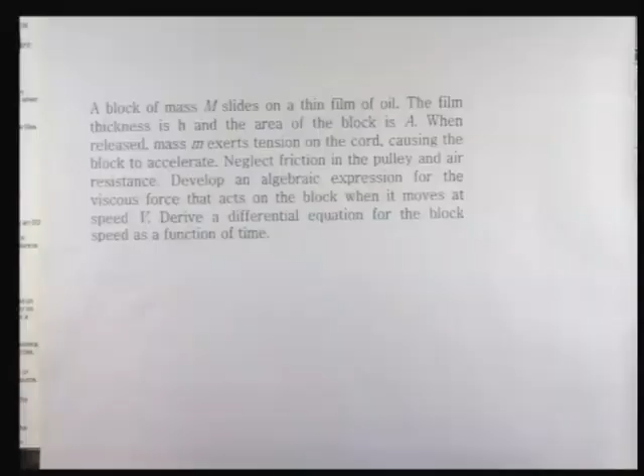So the first problem goes like this. I'll first read the problem. There is a diagram which goes with this problem, given on the next page. We'll move on to that, but first we will read the problem.

A block of mass m slides on a thin film of oil. The film thickness is h and the area of the block is a. When released, mass m exerts tension on the cord, causing the block to accelerate. Neglect friction in the pulley and air resistance. Develop an algebraic expression for the viscous force that acts on the block when it moves at speed v. Derive a differential equation for the block speed as a function of time. That is the problem.

It's a pretty simple problem.

So here is the diagram for the problem. This is the block, and the oil film is also clear here, and this is the pulley, and gravity acts in this direction, that is the vertical direction, and the axis system, the XY axis, have been shown in the figure at the top corner.

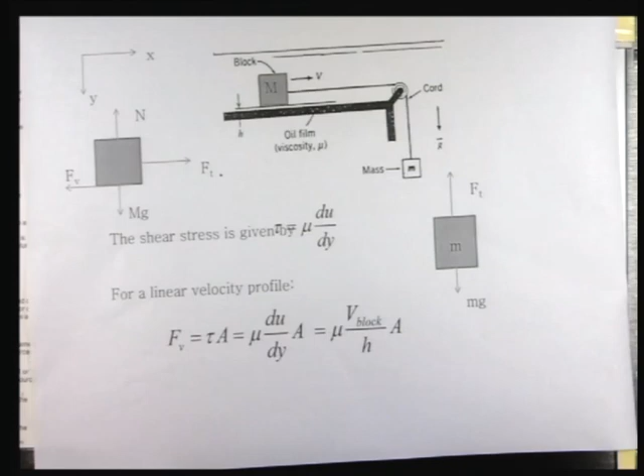So we have two bodies here, two separate bodies. The free body diagrams for these two bodies have been shown also, and the oil film is also shown here. What happens is that this mass m exerts a force on this cord, and this cord in turn exerts a force on this block, and this force in turn causes this fluid to move.

Now this fluid has some viscosity, and that is why this fluid will exert some viscous forces on this block. So overall it will be a balance between this viscous force and the tension of the cord for this block, and for the other block it will be a balance between the tension in the cord and gravity.

So first what we do is we write the shear stress in the fluid. The shear stress is given by this.

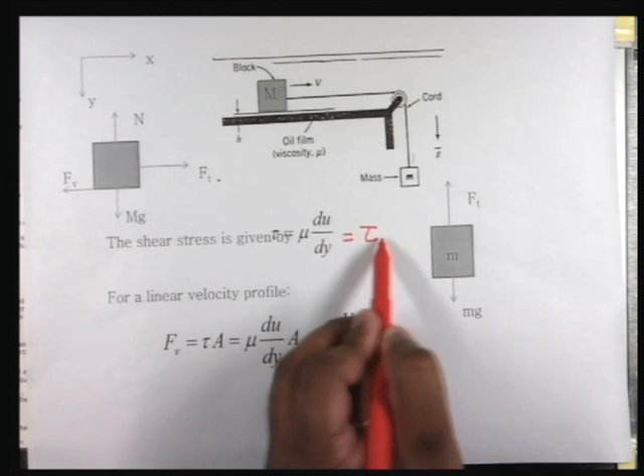I'm sorry, this tau is mixed up. So it will be, this is tau, more precisely this is tau yx for the fluid. This simply follows Newton's law of viscosity: mu times du dy. Mu is the viscosity and u is the velocity. Du dy is the velocity gradient.

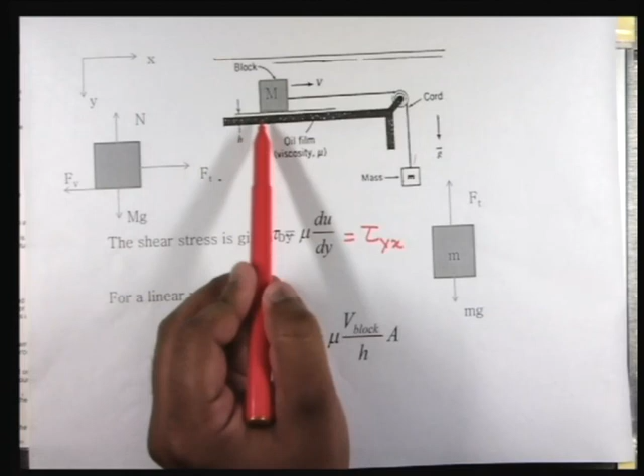Now what we do here is assume the velocity of this oil film to be linear, so velocity varies linearly with y. Velocity is 0 at the solid, and is v at the block surface. So this gradient simply turns out to be v block by h, where h is the film thickness and v block is the velocity of the block.

So this is the stress, that is the force per unit area. The total force on the block will simply be this stress times the area. So the stress is mu times v block by h, and that times area is the force.

Now we can write an equation of motion for the block, which is simply Newton's laws of motion for the block: mass times acceleration equals net force acting on the block, which is the tension of the cord minus the viscous force. For the falling mass, it is again the same, but in this case gravity will be acting, and of course again the tension in the cord.

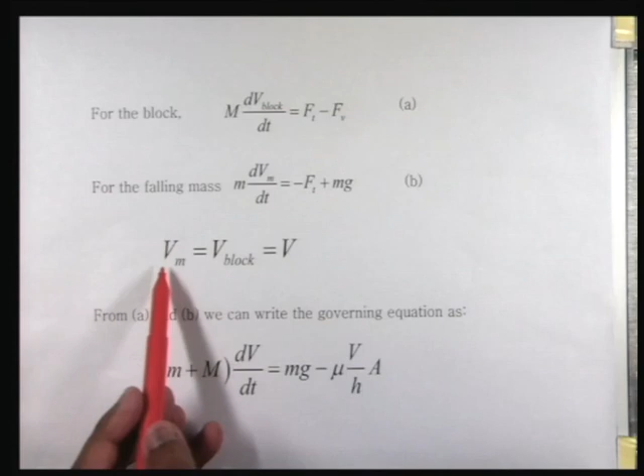Since the cord is not stretching, it has a constant length, so the velocity of the falling mass and the velocity of the block will be equal, which we denote as v. Finally, we add equation A and equation B and replace Vm or V block both with V, and we finally have this equation here.

You can see this is the final equation which we have been asked to derive. This is the acceleration dv dt. This is actually a very simple equation to solve, but we have not been asked to solve it. So that's it.

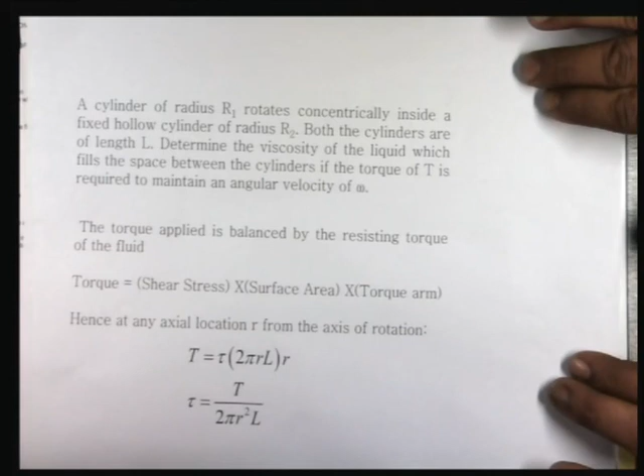Now coming to the second problem.

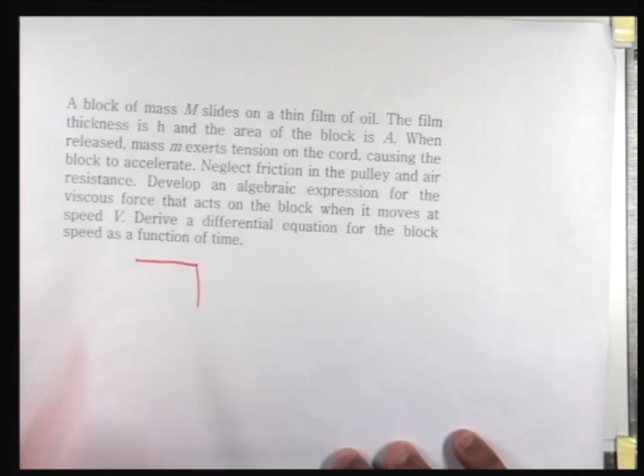A block which is pulled by a string by this system, using a falling mass, which goes over a pulley. There is a fluid layer, a liquid layer, which by virtue of viscosity gives a drag force in the opposite direction to its motion. As a result of this, it moves with acceleration. If the net force is not zero, there will be acceleration. Now you explain. So this is the problem.

This is the block of mass m, which slides on a thin film of oil. This red marked area is the thin film of oil. This block of mass capital M slides on this thin film, and this is attached. This film has thickness h, as given here, and this block has an area A for this portion.

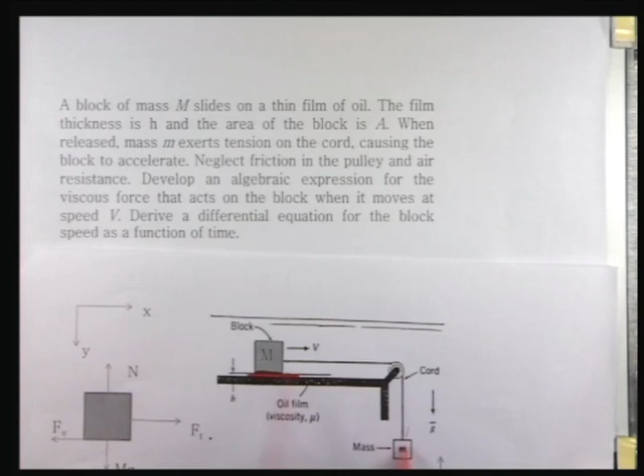This block, as you can see, is attached to another block of mass small m, with a string and a pulley system. This is a pulley and the string, and gravity is of course acting in the vertically downward direction, as mentioned here.

When this system is released, initially at rest, the mass will fall down because of gravity. That will create a tension in the string, and this tension will be acting throughout the string, causing this block to move.

Now when this block moves, the fluid beneath the block will also start moving. And because this fluid starts moving, it will exert a viscous force on this block. This viscous force will of course try to resist the motion of this block.

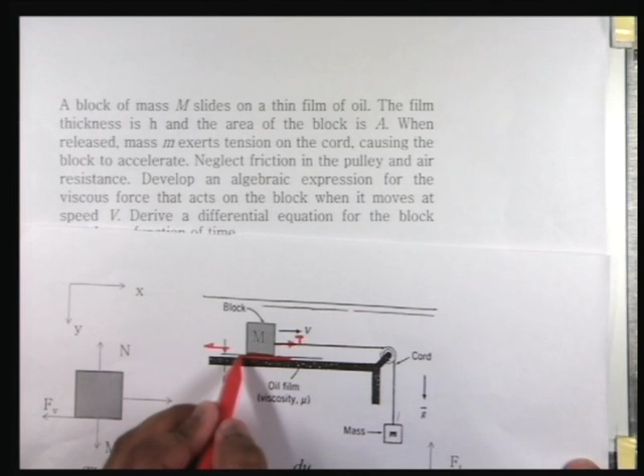The viscous force will act in the negative x direction. So this block will be acted upon by two forces: one along the string, which we call the tension T, and the second force will be the viscous force of the fluid, acting in the negative x direction. The oil will try to resist the motion of the block. Gravity and normal force also act here, but those are not important for this block since it's sitting firmly on the platform.

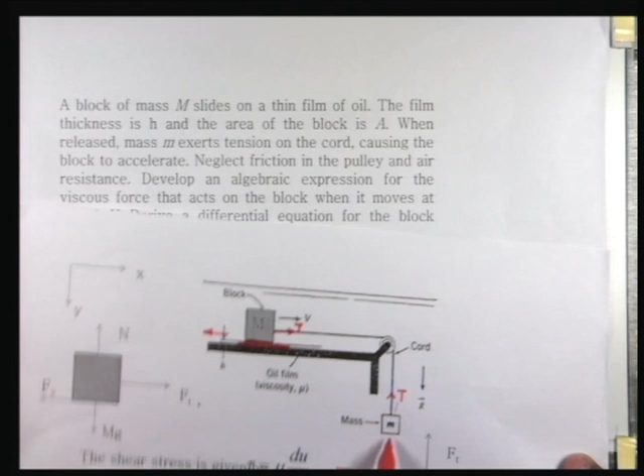For this block, the two forces will be, one, the tension of the string. Due to Newton's third law of motion, this tension will be the same as T, and gravity will act on this block in this direction. So this is mg.

So if we now draw the free body diagram for this block, as you can see, this is the viscous force. This viscous force acts at this surface because the block is in contact with the fluid on this surface. So this is where the viscous force acts, in the negative x direction.

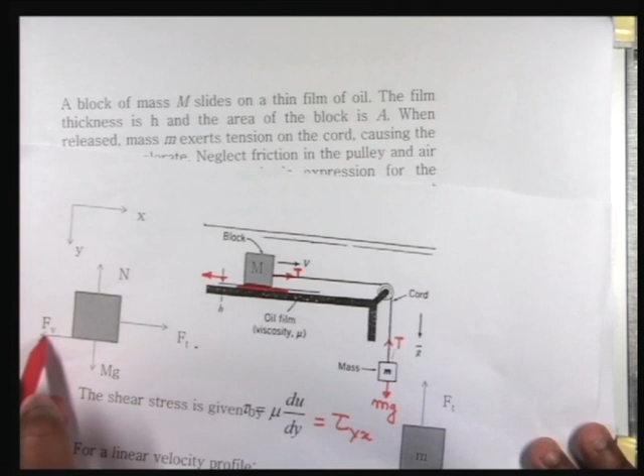We get the directions from this diagram. This is the x-axis, positive x, and this is the positive y-axis. This is the tension of the string, denoted as Ft here, which is the same as T, and of course gravity will act here.

This is the gravitational pull on this big block, and this is the normal force. Since it is sitting on the table, the normal force N will balance gravity. So now the only unbalanced forces on the block are Fv and Ft. Fv is due to the viscous force from the oil, and Ft is the tension of the string.

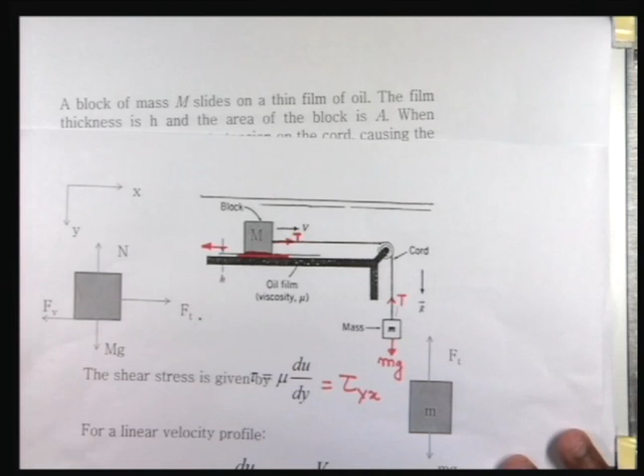Viscous force is given by viscous stress times area. So viscous stress in the oil times the area of the block. The viscous stress in the oil is expressed as follows: since the oil is assumed to be a Newtonian fluid, it follows a linear relationship, with this being the velocity gradient. When the block moves, it creates a velocity in the fluid, and that creates a velocity gradient, which times the viscosity gives us the total stress on this block.

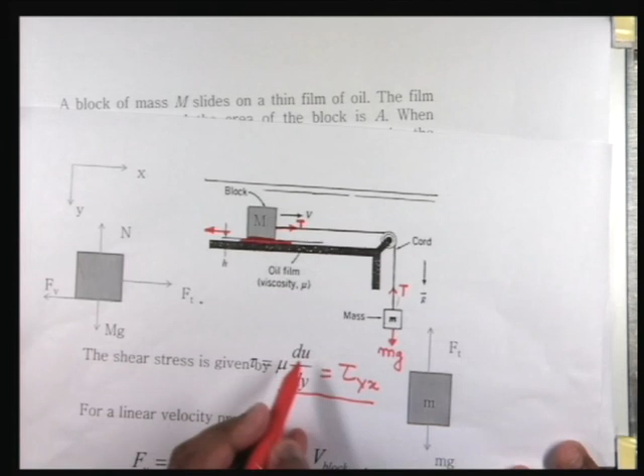Now we have to calculate the velocity gradient, that is the du/dy term. If we magnify the area where the oil film is, drawing it at the bottom of the page, it will look something like this: this is the block of mass m, this is the table, and the oil is here.

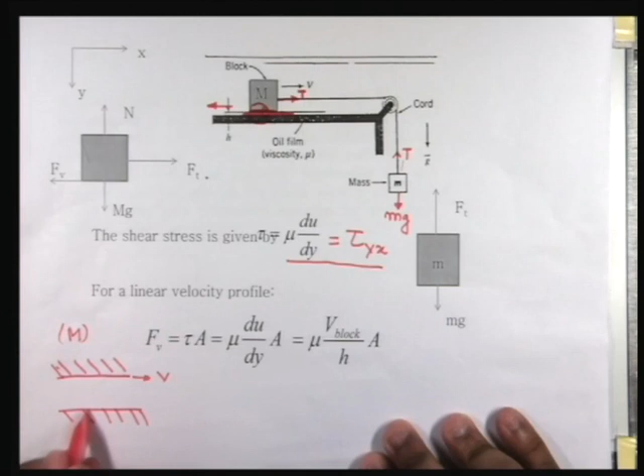We are only drawing a portion in the middle of the system. So if the block moves with velocity v, the velocity at this position will be v, and since the table is not moving, the velocity here will be 0. So this will be u here, and u will be 0 here, since the table is not moving.

We will assume that the velocity varies linearly with y. Suppose this is the y1 direction. We have already noted this as y, so we will call this direction y1, and this is the x direction as mentioned here.

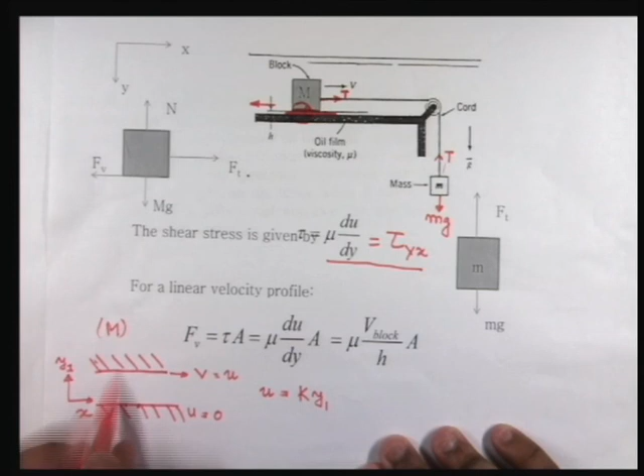The velocity u is 0 here, and the velocity is v here. So we can say u is a linear function of y, as we have assumed. If that is so, then we can write u equal to k times y1, since it's a linear function of this coordinate y1. Now we know that at y equal to 0, u equal to 0, because this is satisfied by the no-slip boundary condition, as discussed earlier. So that condition is satisfied here automatically.

Then we move on to this plate, where at y equal to h, this height is h as mentioned in the figure. So at y equal to h, the velocity here is v. So then we write kh equal to v, which gives us the value of k. So we know k equal to v by h. In this problem, this v has been denoted as v_block, so we write it as v_block.

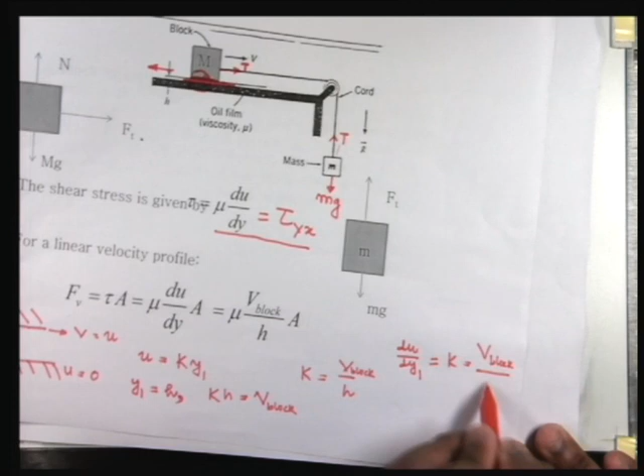So now we know this k. From this equation we know k, and we can substitute this expression for k here, and we can calculate du dy. So du dy1, that is equal to k, that is equal to v block by h. So this is the value of the velocity gradient that we needed here.

This is the velocity gradient, and that multiplied by viscosity will give us the viscous stress. So tau yx would be mu times du dy1. We use y1 here because y1 is the local coordinate for this channel. That is why we are using y1. So this will be nothing but mu v block by h.

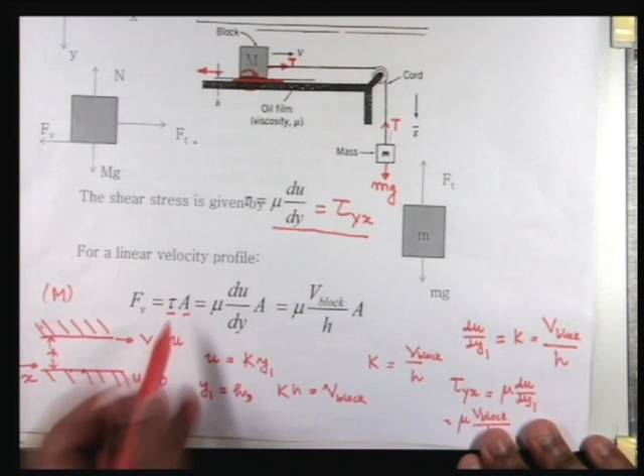Now the total force will be tau times area. Tau is the stress, and stress is the force per unit area, so it is force equals stress times area. Area is given for the block, A is the area of the block as mentioned in the problem. So now we have calculated tau, which is mu times v block by h, multiplied by area. This gives us the viscous force on this block.

So Fv is given. Ft we do not know, that is the tension in the string. That is an unknown that we'll have to determine later on.

So now we move on to this. Once this block is done, we move on to the second body. For the second body, only two forces are at work: these are gravity, this mg working vertically downwards, and the tension in the string, denoted here by Ft.

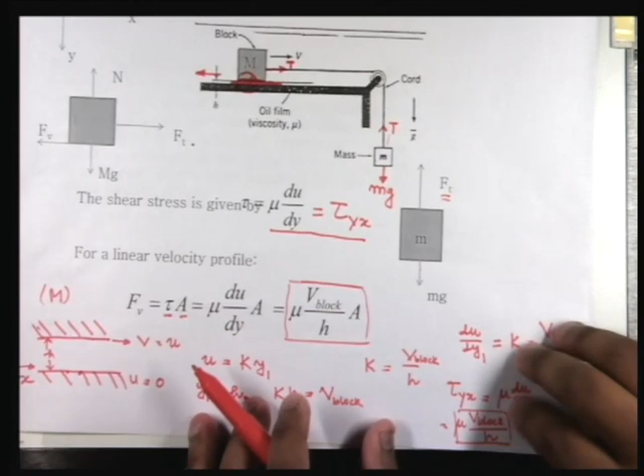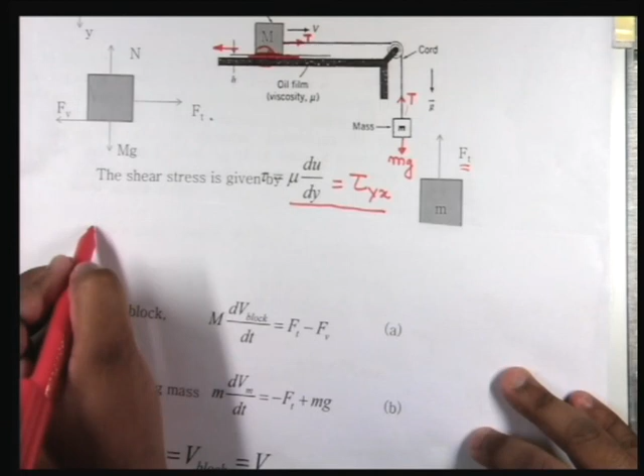This is a pretty simple problem for this particular block. So if we now move on to writing the equations for this block, this will be nothing but m times acceleration equals net force on the block. The net force on the block is Ft in the positive x direction, and Fv in the negative x direction. So this is acceleration in the x direction, this is Ax.

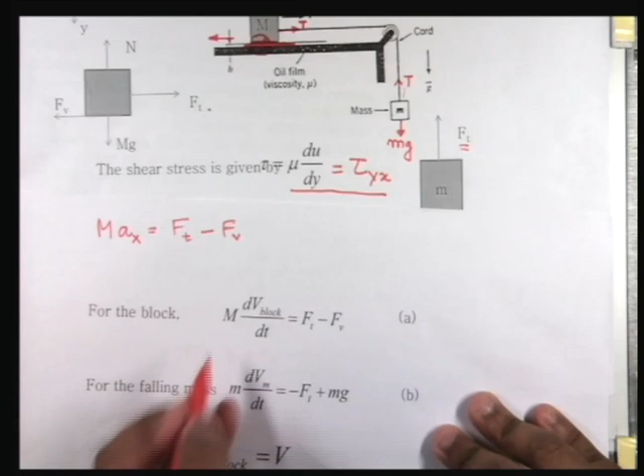So Ft in the positive x direction and Fv, the viscous force that we calculated, Fv equal to this, gives us Ft minus Fv. Now Ax, as we all know, is simply given by dv block dt. This is the expression for acceleration, the time derivative of velocity. So we replace Ax with this expression, and we get this equation.

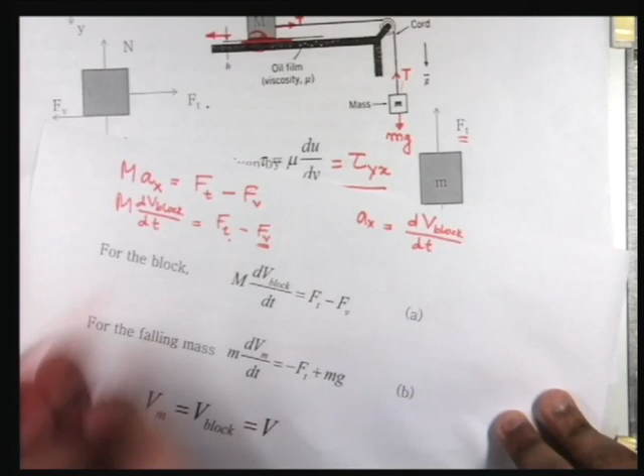Minus Fv. So Ft here is unknown while Fv is known. To find Ft, we apply Newton's laws of motion to the smaller block. We again write the same Newton's second law: mass times acceleration. But in this case the acceleration will be in the y direction, because this block is moving in the y direction. The vertical direction is y.

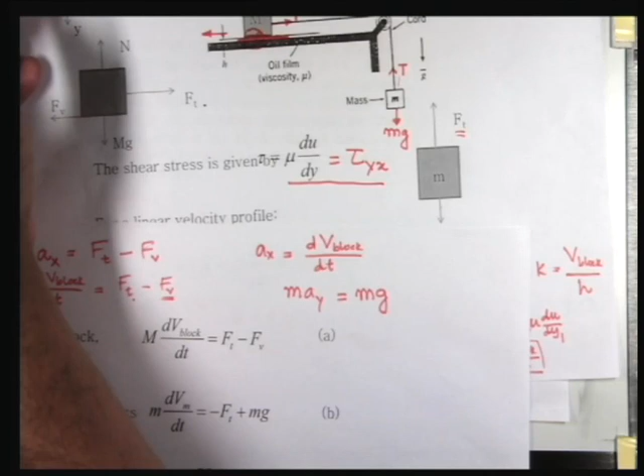This block is moving in the y direction, so it will be m ay equals net force. The net force is the gravity, that is mg. This is positive because downwards is the positive y-axis, and upwards is the negative y-axis. Since gravity acts downwards, this force will be positive, and minus this tension in the string, Ft.

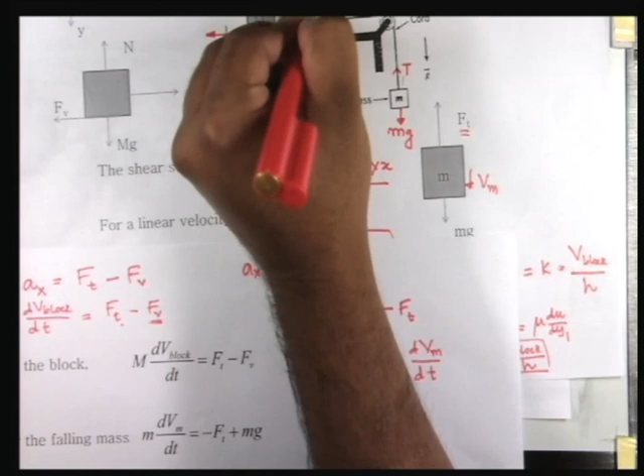Again, we can write Ay as dv dt. If we write the velocity of this block as small vm, as denoted in the problem, we can write it like this: ay is nothing but dvm dt. The velocity of this block is vm, while the velocity of the other block we denote as v block. So we can replace Ay with this in the equation, and we finally end up with equation B. We have already obtained equation A for the other block.

So now we have two equations, and we can add these two equations. You will see that Ft cancels out automatically, since Ft is unknown, we can cancel it out very easily by adding these two equations. We also note that this string is non-stretchable.

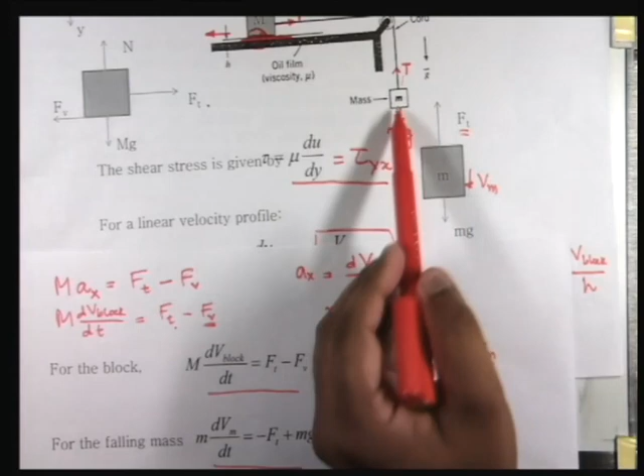This string is not stretching, it's not changing in length. That means the velocity of this block must be the same as the velocity of this block. The magnitudes of these two velocities must be the same, but the direction is different. This one is moving in the positive x direction, and this one is moving in the positive y direction. But the magnitudes of these two velocities are, of course, the same.

So Vm is equal to v block, which we denote with a common symbol, that is v.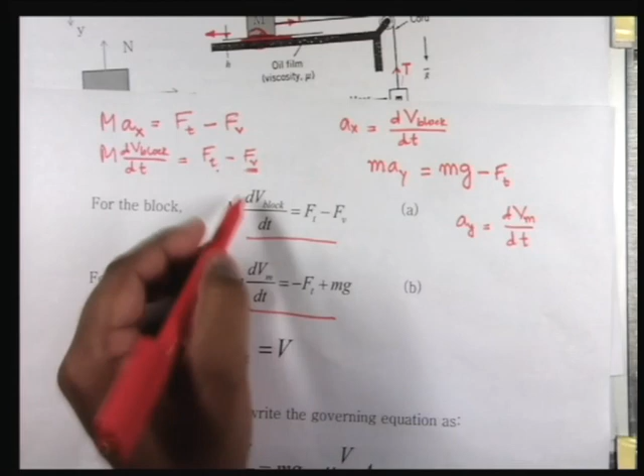Now we add these two equations. By adding, the left hand side is simply this - it's a very simple exercise. It simply adds, and since these two are equal, this dv/dt comes out. The right hand side: Ft cancels, and what remains is mg minus Fv.

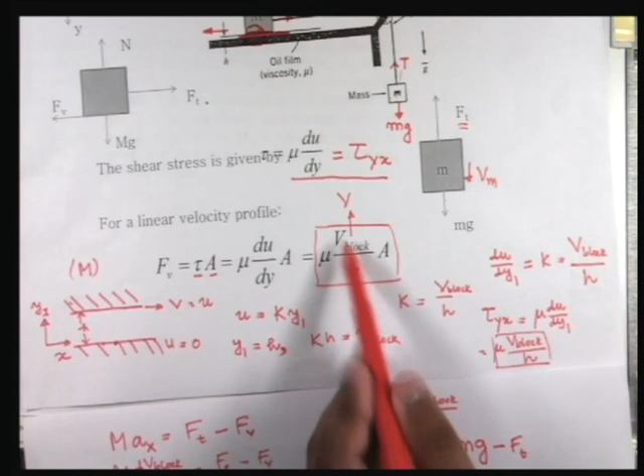So Fv, as we calculated in the previous slide, is mu into v block, and v block again is equal to nothing but v. So it's mu v by h times a. So here it is mg minus Fv, and Fv is nothing but mu v by h times a. We replace Fv by this, and we end up finally with this equation.

So this is the final equation that we obtain for the motion of this block. This relates the acceleration of the block to the velocity of the block, as has been asked in the problem.

Now coming to the second problem, first let me go through the statement. A cylinder of radius R1 rotates concentrically inside a fixed hollow cylinder of radius R2. Both cylinders are of length L. Our objective is to find the viscosity of the liquid which fills the space between the cylinders if a torque of T is required to maintain an angular velocity omega.

Most of you are familiar with this problem - it's commonly used to measure the viscosity of fluid using a rotating cylinder viscometer, a device used to measure viscosity. A similar type of problem is encountered in many industrial applications, like the necessity to transmit power by means of a shaft housed by lubricating oil. I won't go into the details of that. Our objective here is just to find the viscosity of the liquid which fills the space between the concentric cylinders.

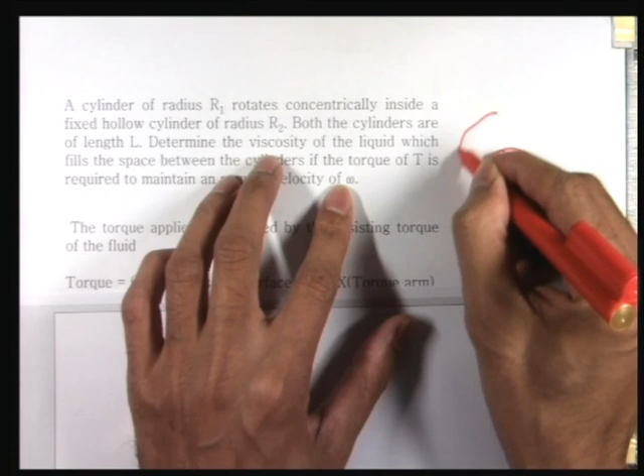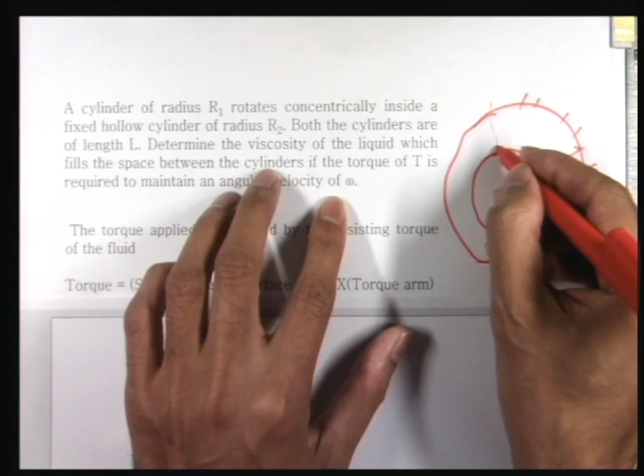So now if I draw this: the inside cylinder is rotating with an angular velocity of omega, whereas the outside cylinder remains stationary. The space between the cylinders is filled by a liquid of unknown viscosity. Our objective is just to find the viscosity of the liquid.

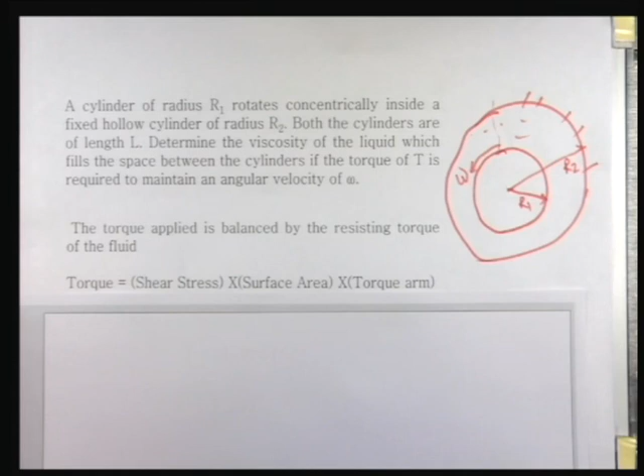The fluid always offers resistance to the rotation of the inner cylinder by means of viscosity, meaning there is a need to supply a torque to resist that viscosity. The applied torque must be balanced by the resisting torque. Our objective is to find the torque, which is nothing other than the shear stress or shear force into the torque arm. Again, the shear force is nothing other than the shear stress times the surface area.

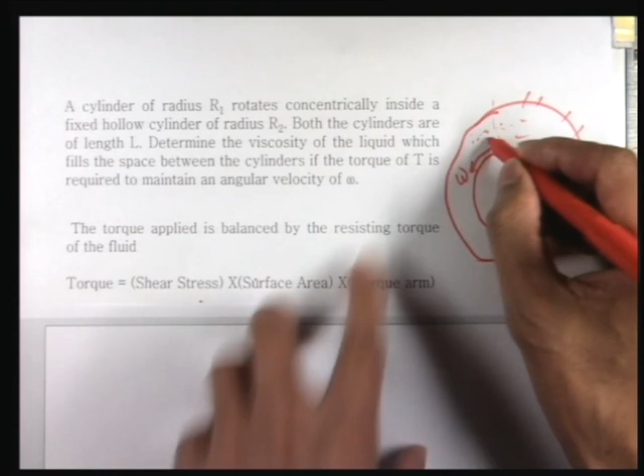Now if we consider within the fluid at a radius small r, let us consider a fluid layer. Now tell me, what is the surface area which is responsible for the shear force? Definitely this is nothing but the circumference times the length of the cylinder. The circumference is 2 pi r, and the length of the cylinder is L. That means the surface area responsible for the shear force is 2 pi r L.

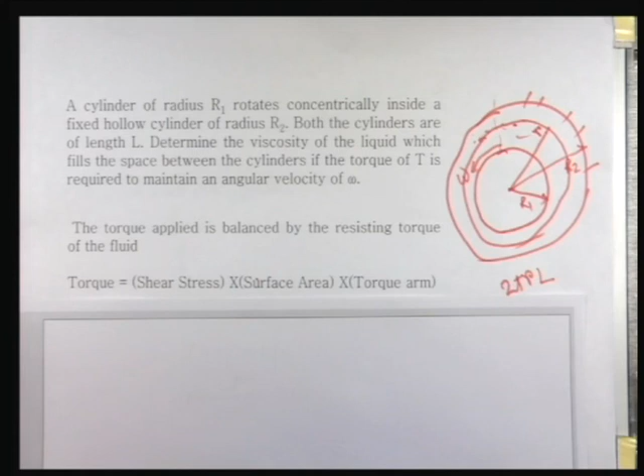So now if we come to any axial location, this is shear stress tau times 2 pi r L, which is the surface area responsible for the shear force, times r. That means we can easily find the shear stress as torque divided by 2 pi r squared L.

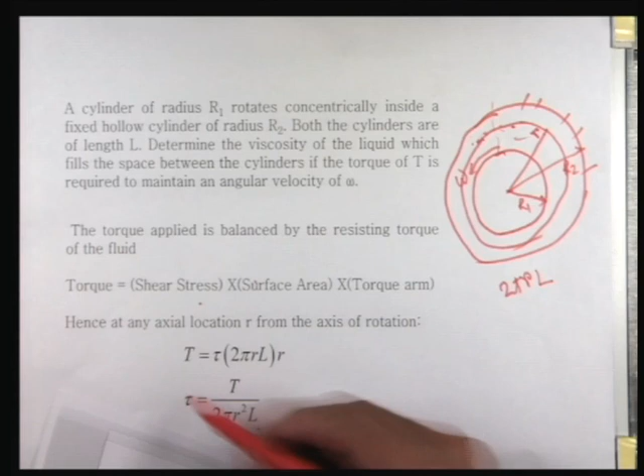Now our next objective is to find the shear stress, tau. So tau is unknown - what is the parameter that is given? Torque is given, this is a given parameter. Length of the cylinder is given. So our objective is to find the shear stress.

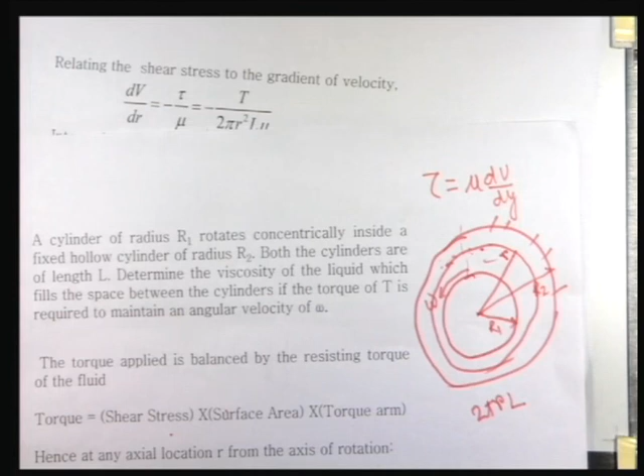So you are already familiar with Newton's law of viscosity. I already told that tau is somehow related to shear stress, which is related to the rate of angular deformation, and here it is in terms of the velocity gradient.

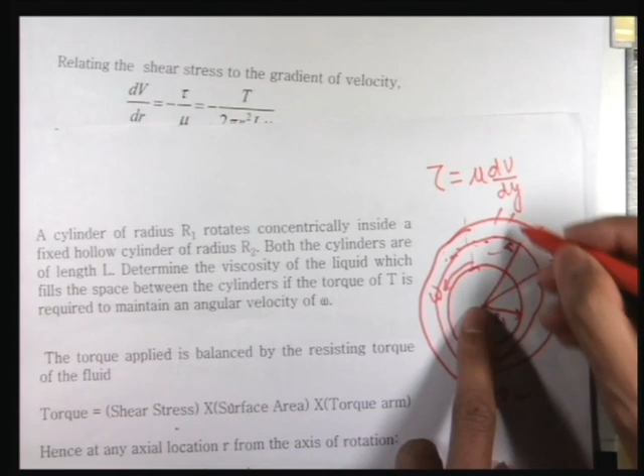Now one more thing already mentioned by Professor Chakraborty, how to measure the y direction. If we measure r from the center of rotation of the inner cylinder, y must be measured from the outer cylinder. So if we relate r and y, this is nothing but capital R minus small y.

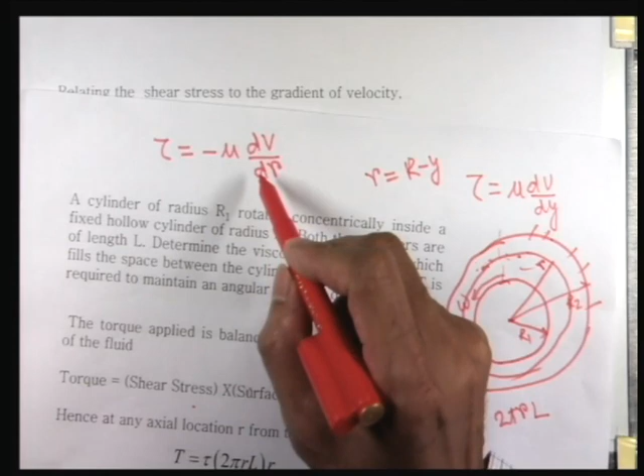So we can write that shear stress tau is nothing but minus mu dv/dr. This is tau equals mu dv/dy. Here, if we write the relation where r is measured from the center and y is measured just from the outer cylinder, we can write the velocity gradient as dv/dr equals minus tau by mu.

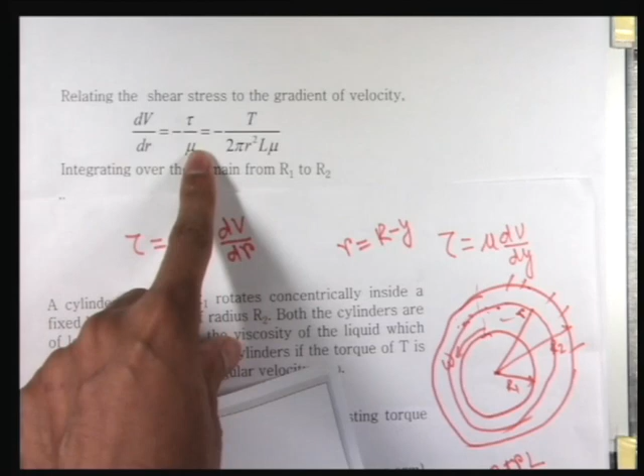Again we have already found that tau equals T by 2 pi r squared L. If we substitute this tau, we get dv/dr equals minus T by 2 pi r squared L mu.

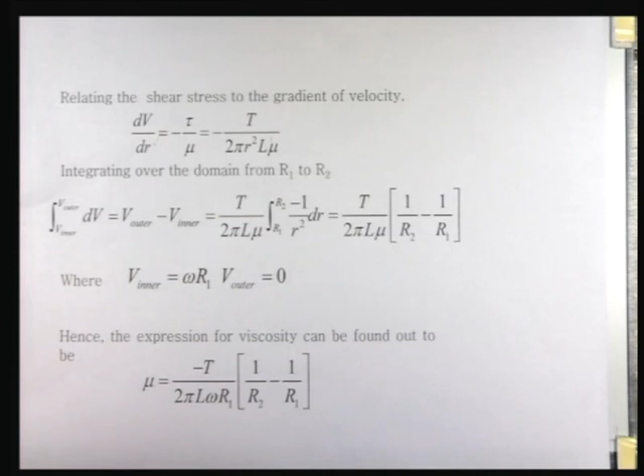So now if we integrate this velocity gradient throughout the domain, from the inner cylinder to the outer cylinder, we get dv equals v outer minus v inner. We already mentioned v outer, the outside cylinder, is stationary, so v outer is 0, and v inner is omega r1. Now if we integrate this from r1 to r2, we get this expression.

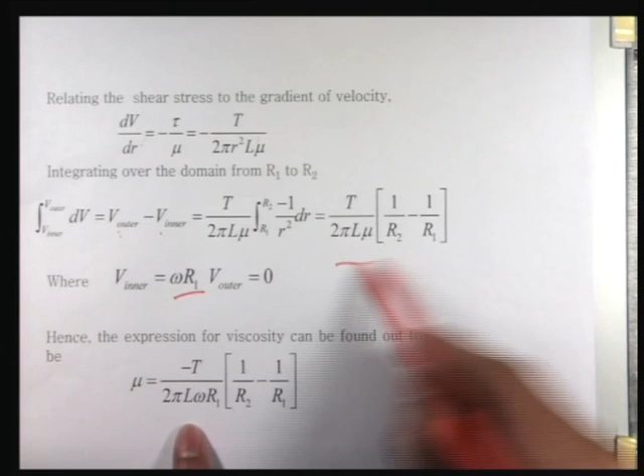So now our objective is to find mu, the dynamic viscosity of the liquid that fills the cylinders. If we simplify these expressions, we get this type of expression. After simplification it comes to T(R2 minus R1) by 2 pi L omega R1 squared R2.

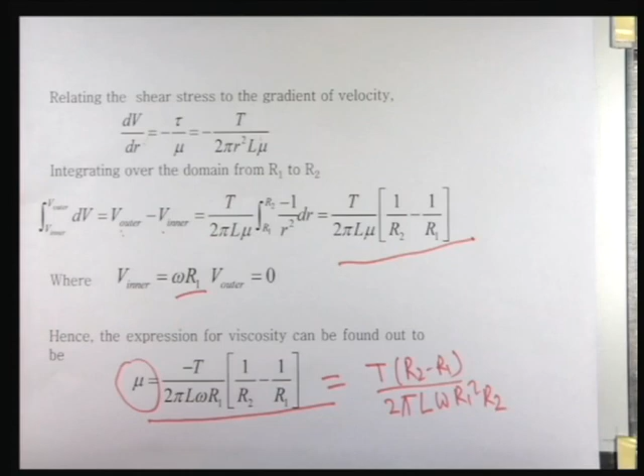Now one important thing is, if we have tau equals minus mu dV/dr, as seen before, if we use a linear velocity profile - that means if the space between the cylinders is very thin - will we get the same expression for dynamic viscosity or not? That's the question.

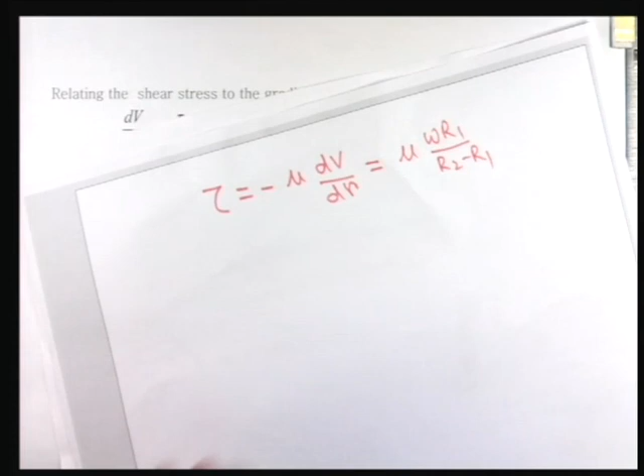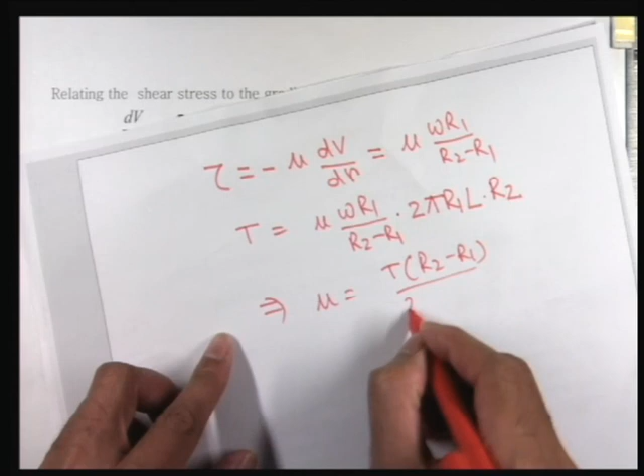Just simply going through that, we get mu omega r1 by (r2 minus r1). This is the shear stress. Then the shear force or torque involves mu omega r1/(r2 minus r1) as the shear stress. What will be the surface area? Since the thickness of the liquid is very thin, we can simply use 2 pi r1 L, and similarly use r1 or r2 since the thickness is very small. So if we simplify this, we get T(r2 minus r1) by 2 pi omega r1 squared r2 L.

So if you see, the expressions are totally the same. Clear? Any problem to understand?

Hello. Hello, sir, I have one question.

Yes, we have not considered the fluid field at the bottom of the inner cylinder. Yeah, the fluid will also be in the gap at the bottom face of the inner cylinder, due to the rotation of the inner cylinder. So the viscosity will also affect things from the bottom side. If it is horizontal, then it's okay, that's not considered.

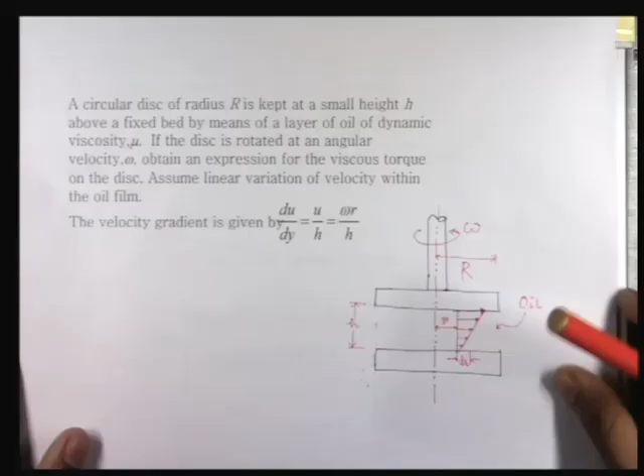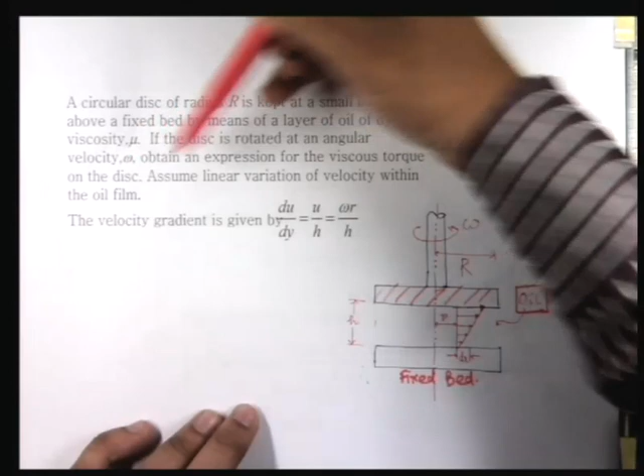So the third question, please note it down. A circular disc of radius r is kept at a small height h above a fixed bed by means of a layer of oil of dynamic viscosity mu. So this is the disc, and this is the fixed bed. The disc of radius r is kept at height h above the fixed bed by a layer of oil between the two plates. If the disc is rotated at angular velocity omega, obtain an expression for the viscous torque on the disc. Assume linear variation of velocity within the oil film.

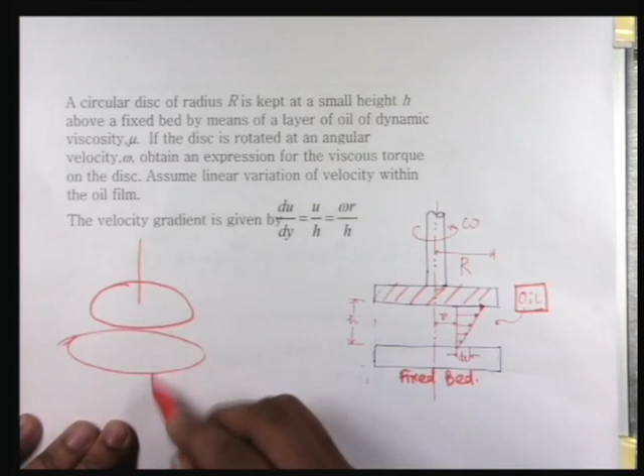So the disc is rotated with an angular velocity omega. In 3D, this is the fixed bed, and this is rotated with angular velocity omega. So in the plane, the velocity at any cross section r will be omega into r. This velocity is in the plane, and as r increases, the linear velocity at the circumference also increases. So at any cross section r, the velocity into the plane is omega into r.

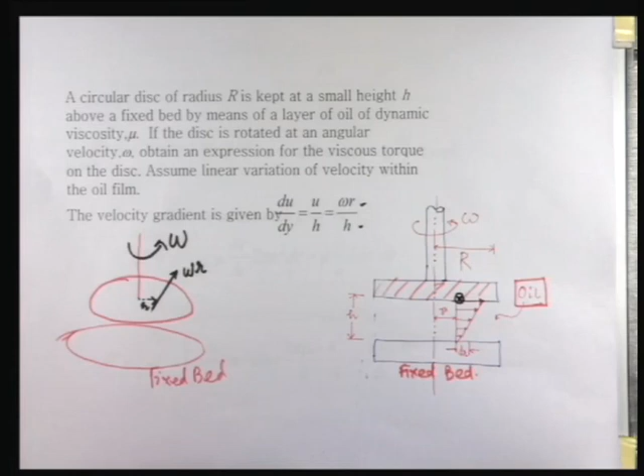Now the gradient of velocity will equal the velocity at the top plate minus the velocity of the bed, which is 0, since the bed is assumed fixed. So the gradient of velocity equals omega r divided by the gap, which is h. Why do we need the velocity gradient? Because we want to find out the torque. So the first step is obtaining the gradient of velocity, which equals omega into small r by h, where small r is any arbitrary r.

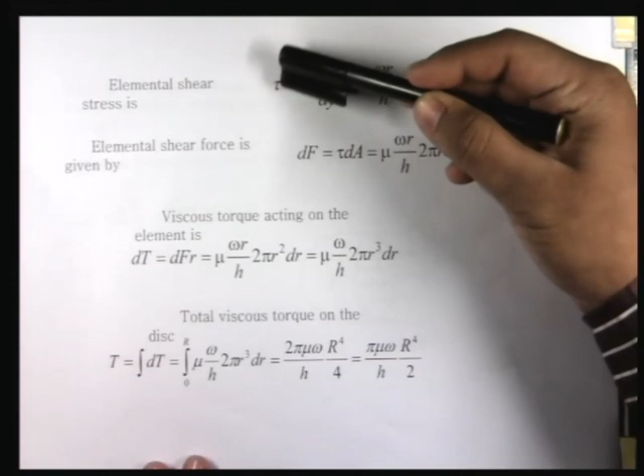As Professor Chakraborty had said, the stress is proportional to the gradient of velocity through the proportionality constant of the dynamic viscosity. So tau equals mu into du/dy.

When we assume the profile to be linear, du/dy will simply be what we had derived before, omega r divided by h. So the shear stress at the top wall is equal to mu into du/dy, which is equal to mu into omega r by h.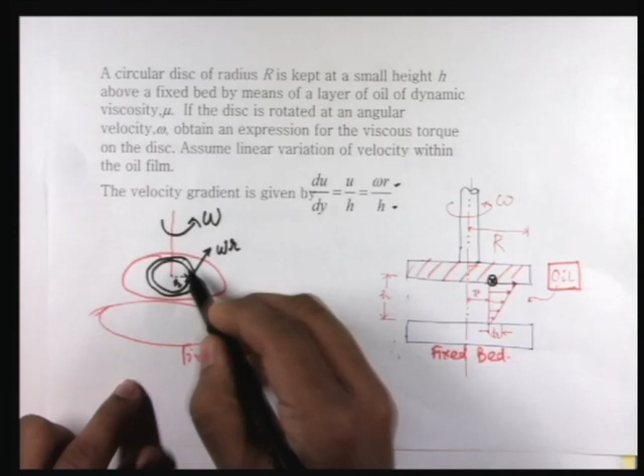From this elemental shear stress, we can find out how much force is acting on this elemental area. If this strip is of width dr, the area of this strip will be 2 pi r into dr. So the stress tau acts on this elemental area, which is equal to 2 pi r into dr.

As a result, the elemental shear force acting on the top plate can be found as tau into dA, which is equal to tau into the area of the elemental strip: mu into omega r by h into 2 pi r dr.

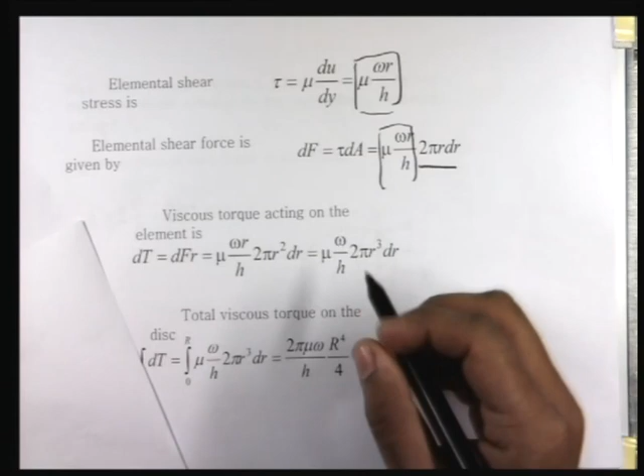Now we are interested in finding out how much torque we have to apply. This elemental shear force is acted upon by a moment arm r. Let me draw it clearly. If this is dF, and this is the area of the strip, the moment will be equal to this small r times dF.

So the elemental torque dt is equal to dF times r. We plug in the value of dF as we had found out earlier, tau into dA, and multiply that by r. We obtain an expression for the elemental torque.

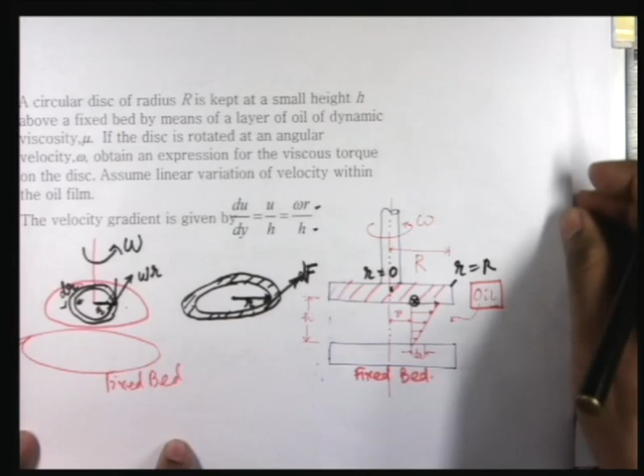Now to find out the total torque acting on this, we simply integrate the differential torque over the domain, ranging from the center of the disk at small r equal to 0, to the edge of the disk at small r equal to capital R. So you integrate that expression with respect to r from 0 to capital R and hence obtain an expression for the total viscous torque acting on this.

So this is the expression for the total torque required to keep the disk rotating at an angular velocity omega at a height small h. This can be used to measure the viscosity and is fundamental in viscometers, because you can evaluate viscosity by knowing the amount of torque needed to rotate it and by knowing the angular velocity at which it is rotating.

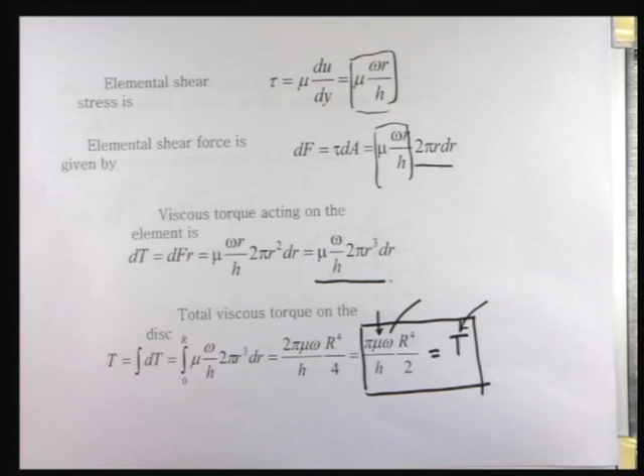Okay, any questions? So we move on to the next question.

This is pertaining to surface tension, so please note it down. What is the pressure within a 1 millimeter diameter spherical droplet of water relative to the atmospheric pressure outside? So we have a droplet of water which is in a quiescent atmosphere, and it is given that the diameter is 1 millimeter. So the task is to evaluate the differential in pressure, how much is the delta P because of this surface tension.

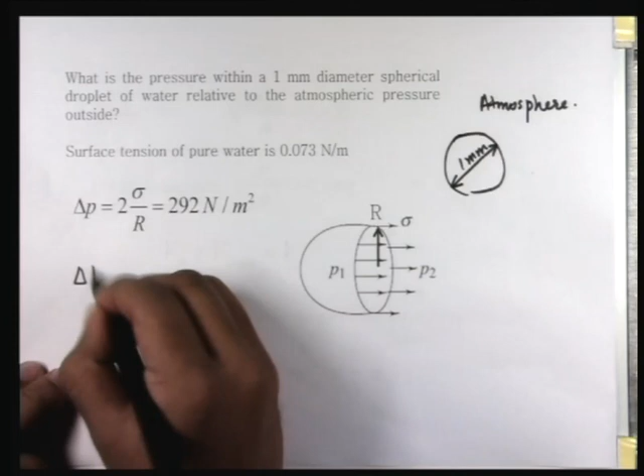From the Young-Laplace equation, we had delta P equal to sigma times 1 by R1 plus 1 by R2, where R1 and R2 were the two radii of curvature. In the case of a spherical drop, R1 equals R2 equals radius of droplet, so this equation boils down to 2 sigma by R.

The typical value of surface tension of water in contact with air is 0.073 Newton per meter. So on plugging in the values, 2 into sigma divided by R, we find that the pressure inside the droplet is greater than the atmosphere by 292 Newton per meter square. This is a straightforward calculation. So because of this curvature, the inside pressure exceeds that of the atmosphere by this value.

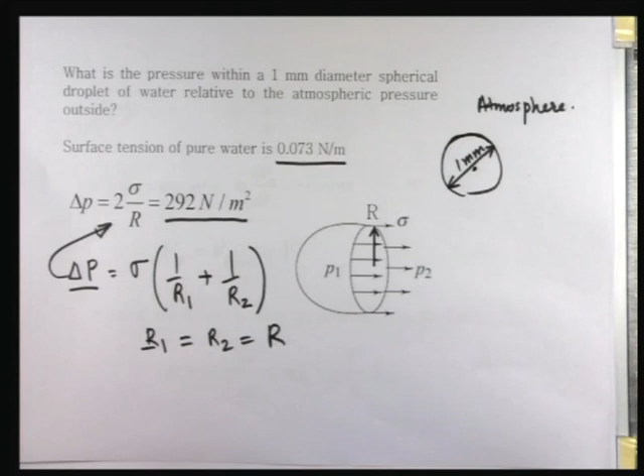Any question? Yes. The answer is 146. For which? This one? Last one. Which question?

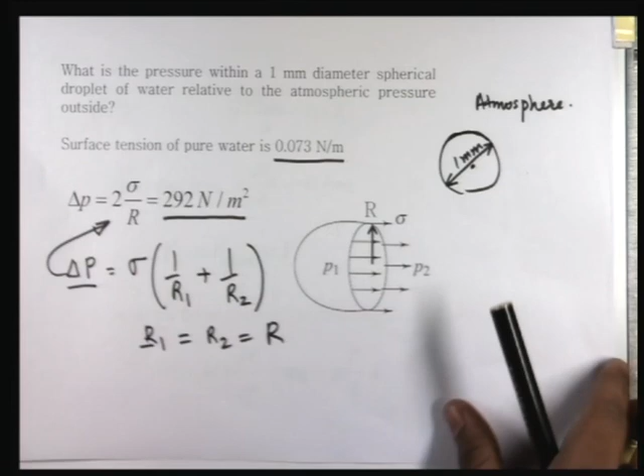292, 2 sigma by r. R is 0.5 mm, the diameter is 1 mm, the radius is 0.5 mm. See, it's straightforward, right? 2 into 0.073 divided by 0.5 times 10 raised to minus 3. So it comes to 292. That is radius, not the diameter, use the radius, I guess.

Very clear, it has been explained to you very clearly. So we move on to the next problem.

The problem is this: find the change in volume of a 1 meter cube of water at 27 degrees Celsius when subjected to a pressure increase of 2 meganewton per meter square. The bulk modulus of elasticity of water is given at 27 degrees Celsius as 2.24 into 10 to the power 9 Newton per meter square. It's a very straightforward problem.

We know that the bulk modulus is defined, as Som sir earlier told us, as the limit delta V tends to 0, of minus delta P by delta V by V. This, as you know, is known as the volumetric strain.

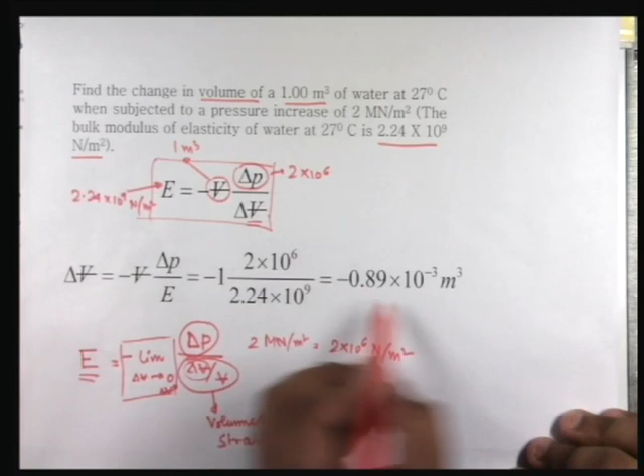So this is minus 0.89 into 10 to the power minus 3 meter cube. As you can see, this is negative. Delta V is negative, which shows us that if we apply pressure, any body compresses, that is, it decreases in volume. Very strictly speaking, this compressibility, as Som sir earlier told, is the isothermal compressibility, as mentioned, since the temperature is mentioned, this E is at constant temperature.

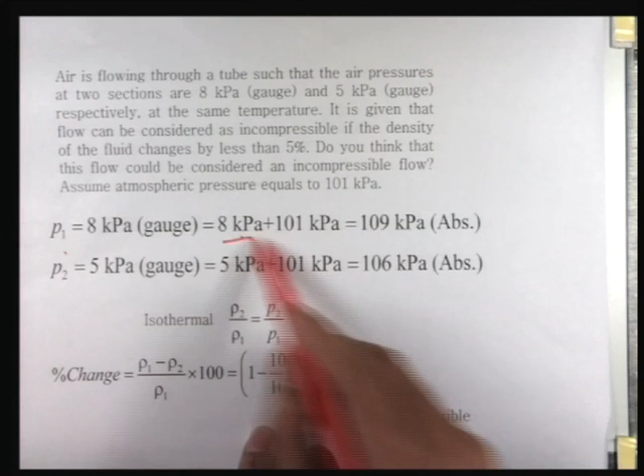Now you have to justify whether the flow is incompressible or compressible by knowing the pressure at two different locations. First, find the pressure at section 1 in terms of absolute scale. The gauge pressure is in terms of the local atmospheric pressure, so just convert the gauge pressure to absolute pressure: gauge pressure plus local atmospheric pressure. This is 109 kilopascal absolute. Similarly, pressure at the other section, 5 kilopascal gauge, comes to 106 kilopascal absolute.

For isothermal conditions, the density can be related to pressure since temperature remains constant. So rho 2 by rho 1 equals P2 by P1. Our objective is to find the density change between the two locations. If we find the percentage change in density, rho 1 minus rho 2 by rho 1, that comes out as 2.75%.

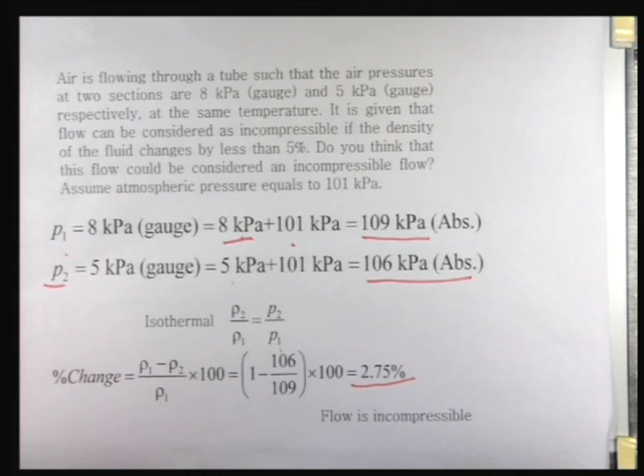As the problem statement already mentions, the fluid can be considered incompressible if the density changes by less than 5%. Since the density change here is 2.75%, we can consider the flow as incompressible. This means that by knowing the pressure at two different locations, even without knowing the bulk modulus of elasticity, we can determine whether the flow is incompressible or compressible. Any questions?